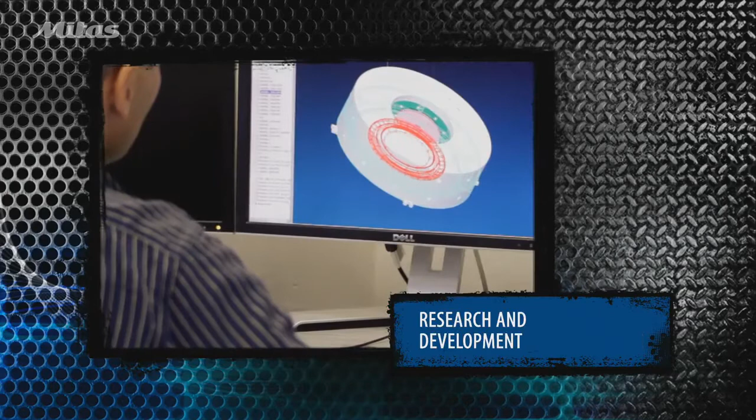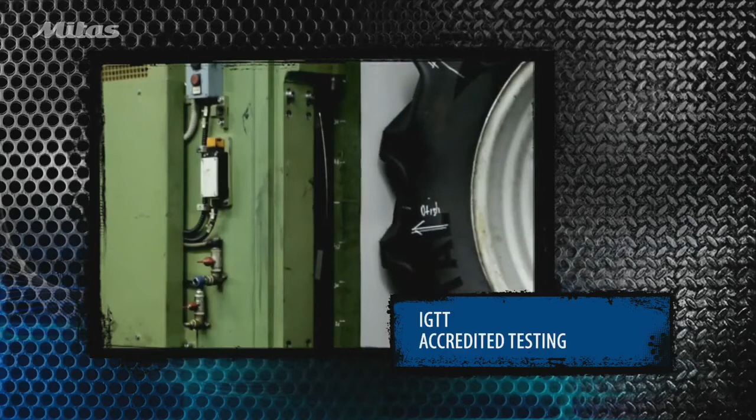We respect international standards. MITAS is a member of the European Tyre and Rubber Manufacturers Association. We invest in research and development to make our tyres long-lasting, fuel-efficient and reliable. The process of developing a new tyre, creating rubber compounds and testing may take up to 4 years from conception to production. Tyres undergo testing in operating conditions and in our accredited testing facility. We insist on quality, effective production, employee expertise and environmental protection.

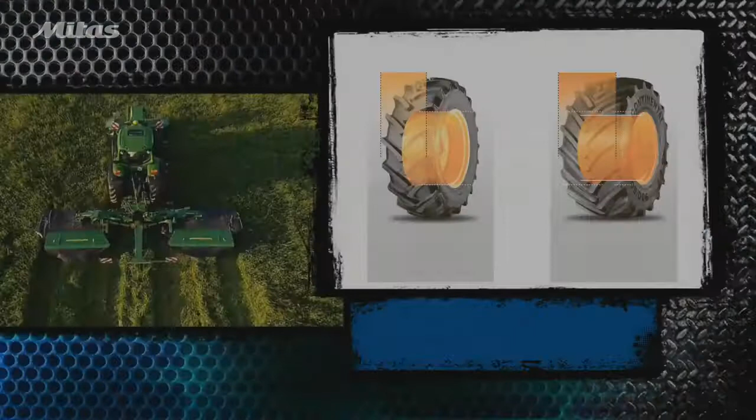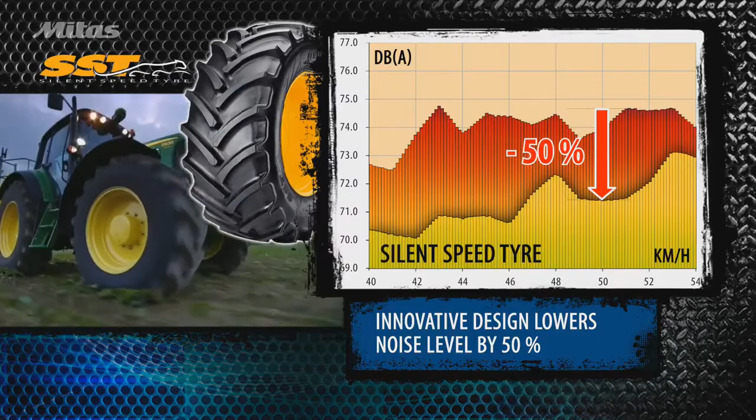Tyres with new features. Super volume tyres are made for power tractors of 200 horsepower or more. With Silent Speed Tyres, we have managed to decrease noise levels in tractor cabins by 50%. When driving, the links between the tread blocks of CR01 tyres stabilise mobile cranes and even out tread wear.

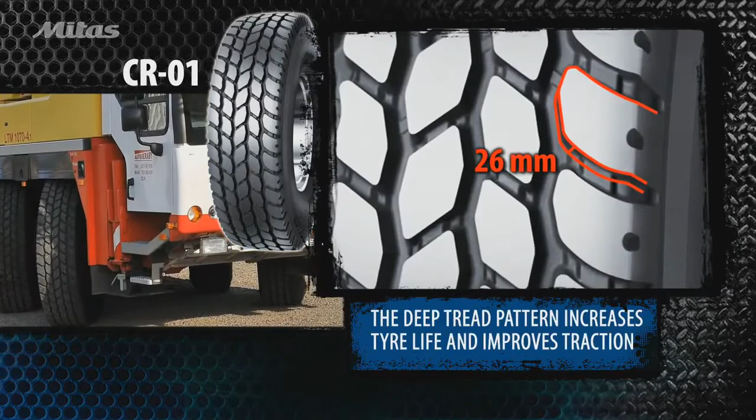An innovative tread compound and all-steel radial construction increases the casing durability of ERL20. Agriterra is a flotation tyre intended for trailers. Agriterra has a longer tyre life and improved self-cleaning properties.

Production plants of MITAS. MITAS produces tyres at 4 European factories. In the Czech Republic, our production plants are located in Otrokovice, Prague and Zlín. In Serbia, the MITAS plant is located in Ruma. Since 2010, MITAS is also present in Iowa, in North America. MITAS has 3,000 committed employees. The total annual production capacity exceeds 100,000 tonnes.

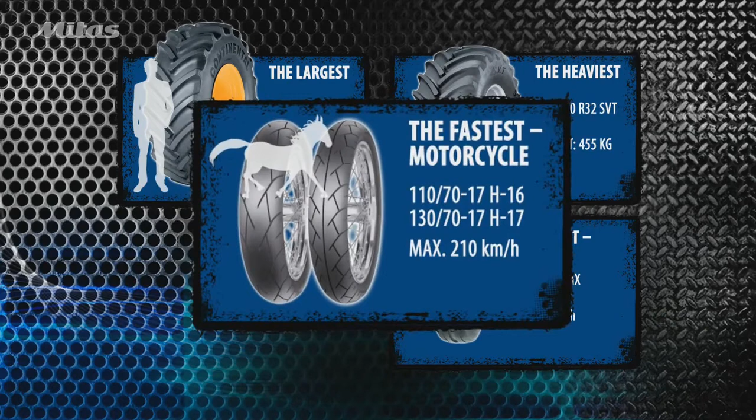Interesting facts about tyres made by MITAS. The largest tyre produced by MITAS has a diameter of 2.2 metres and features 38.5 kilometres of cord. The heaviest tyre weighs 455 kilograms and contains 51.5 kilometres of cord. The fastest road tyre is a motorcycle tyre that allows speeds of up to 210 kilometres per hour. The fastest tyre is an aircraft tyre that allows speeds of up to 300 kilometres per hour.

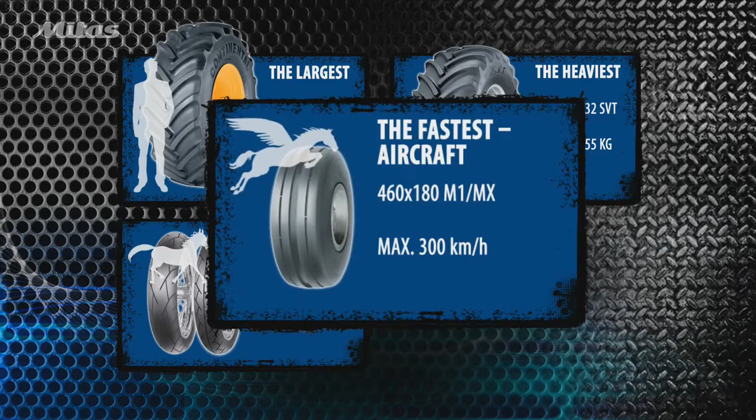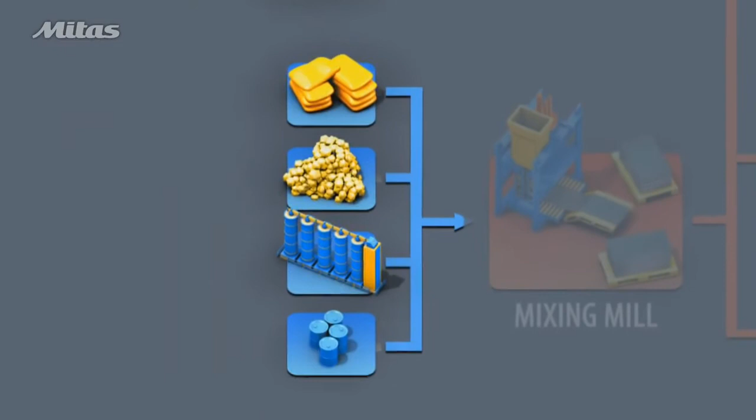This section explains how tyres are produced. These are the main stages of tyre production. The basic components in tyres are steel wires and cord, natural and synthetic rubber, various chemicals and carbon black. The dominant component in tyres is rubber.

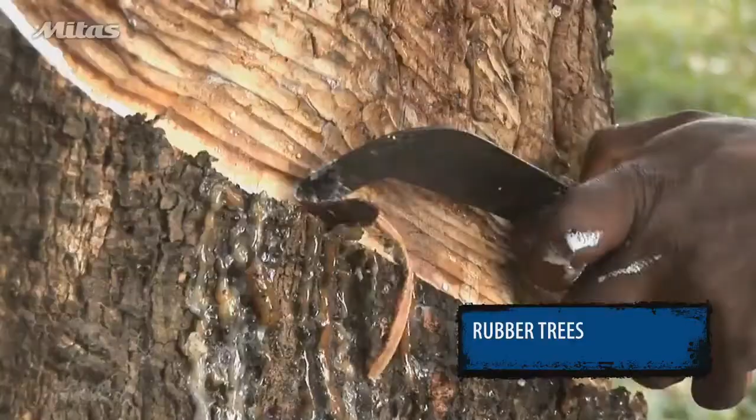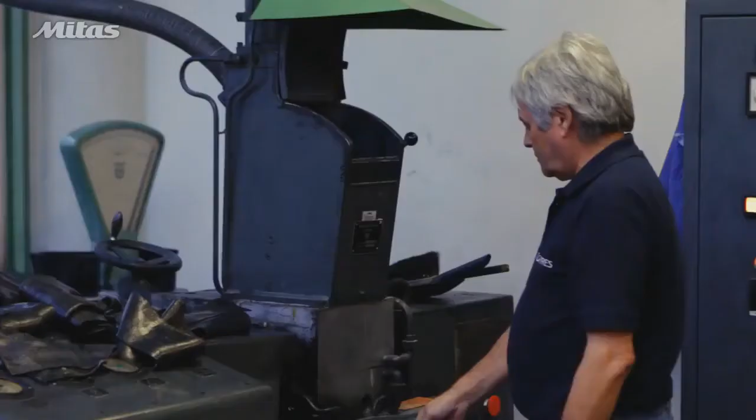8,000 kilometres from the heart of Europe, rubber trees are grown. Incisions are made to harvest the liquid latex. Natural rubber is the most important product obtained from latex. Rubber is then transported to the production plant with the rest of the raw materials and components. In a laboratory, the quality and physical properties of the rubber are tested. If the sample complies with our stringent requirements, the batch is delivered to the mixing room.

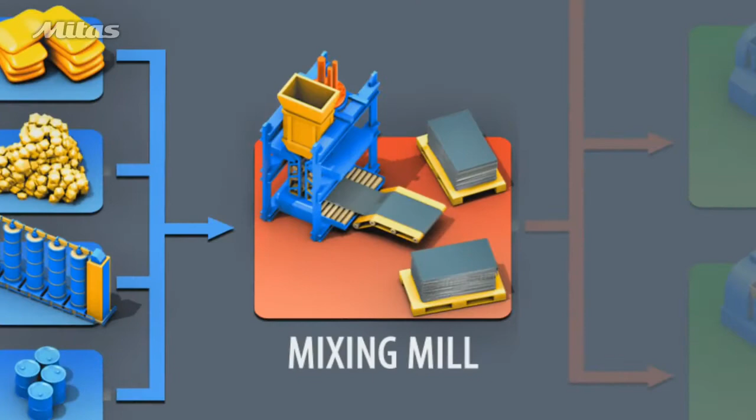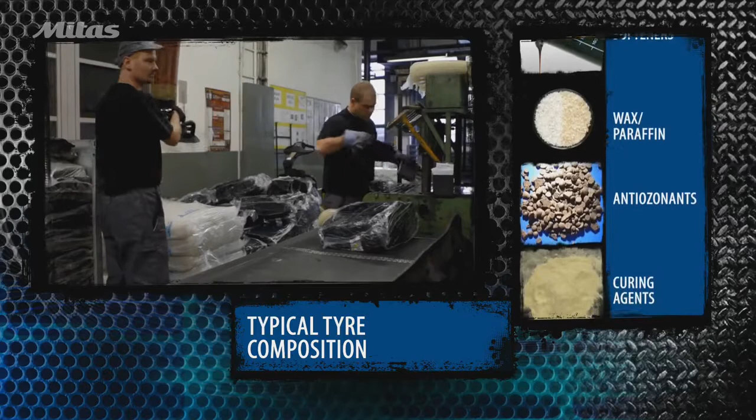Rubber compound mixing. The first stage of tyre production is rubber compound mixing. At the mixing mill, the rubber is mixed with various materials. These include fillers, clay, and carbon black. At the last stage of mixing, sulfur and curing agents are added. The resulting compounds have various properties. Some are used for the inner liner, which holds air inside the tyre, and others are wear resistant and are used to make the tread.

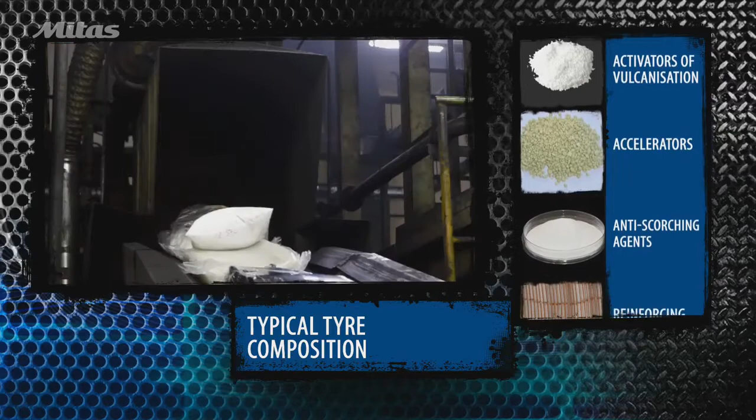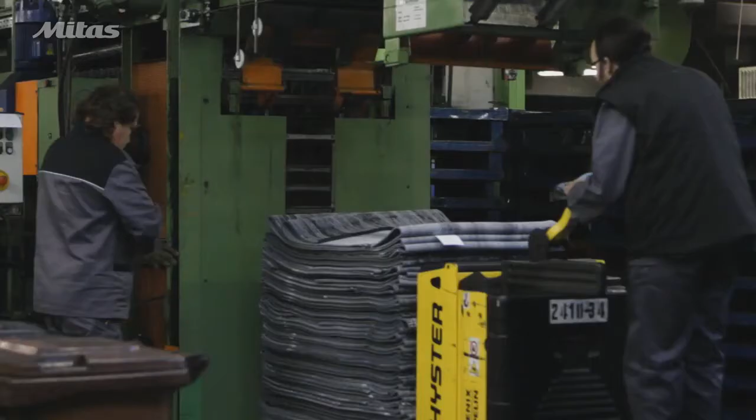In the laboratory, the density of cured samples and other physical and mechanical properties are measured. The resulting blend is formed into rubber sheets and cooled. Each batch is weighed and identified. After additional testing, the rubber compounds are used in further processing.

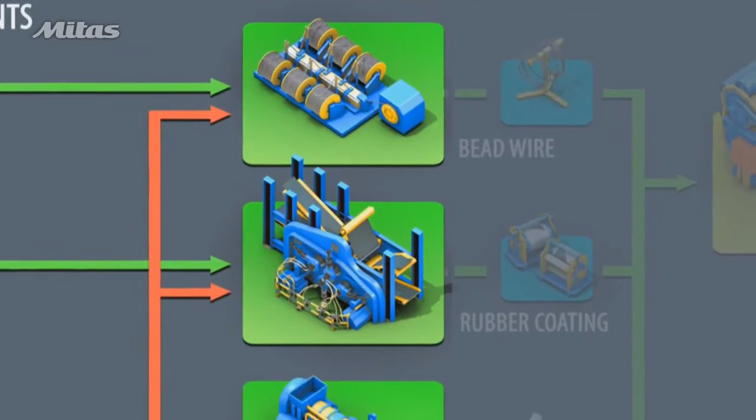Next, we will show the basic components that make up a tyre. The components are produced during further processing. These are bead wires and rubber-coated cord. Other components are extruded and calendered from various rubber compounds.

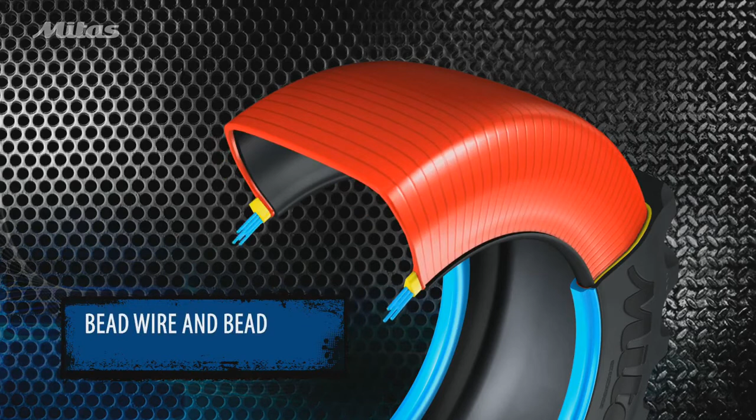This animation displays the basic components of an agricultural tyre. The inner liner is used in tubeless tyres. This is the first carcass ply. Then the bead core and bead wire. And then another carcass ply. Bead lining, and the rim strip.

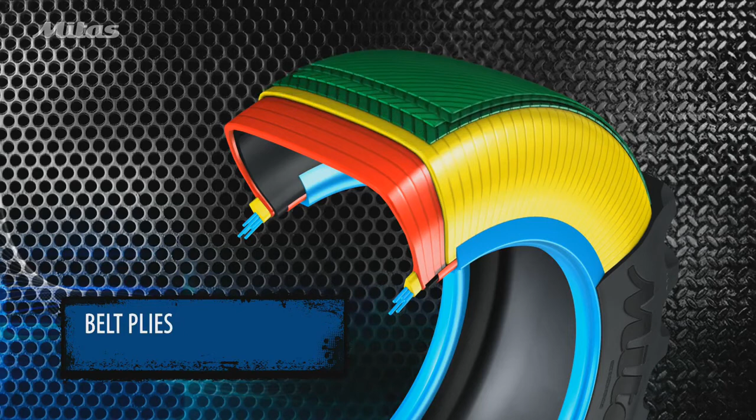These are belt plies. And finally, the sidewall and tread.

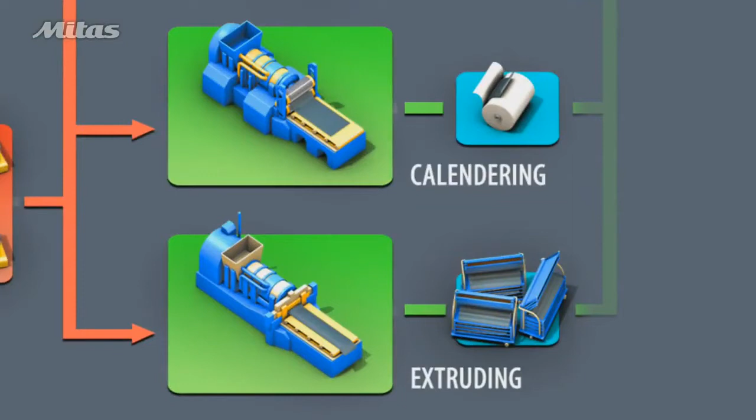Extruding and calendering of tyre components. The mixed rubber compound is used for calendering the inner liner and extruding the tread and sidewall. First, the rubber compound is heated. Then the compound is put through extruder machines, where the tread and sidewalls are formed in the required shapes.

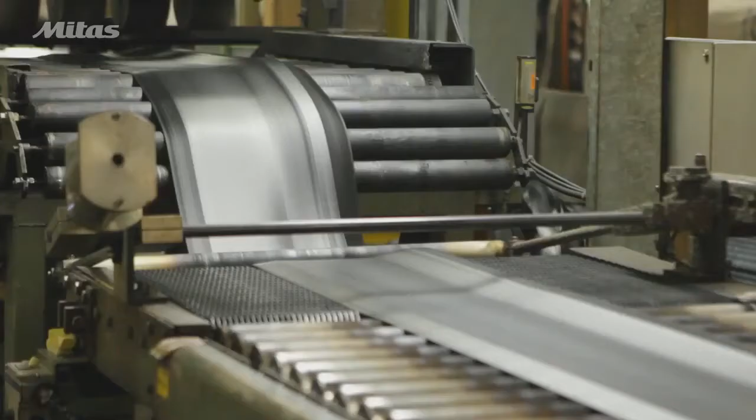The extruders produce a continuous sheet of tread rubber. The sheet is then cooled and cut to specific tyre lengths. The inner liner is produced by calendering. Rubber coating.

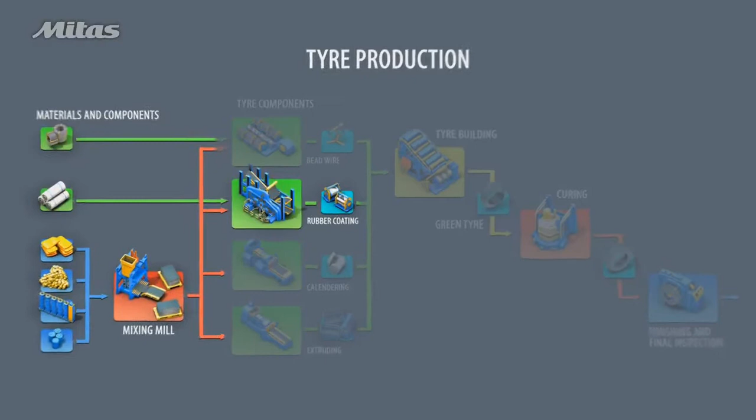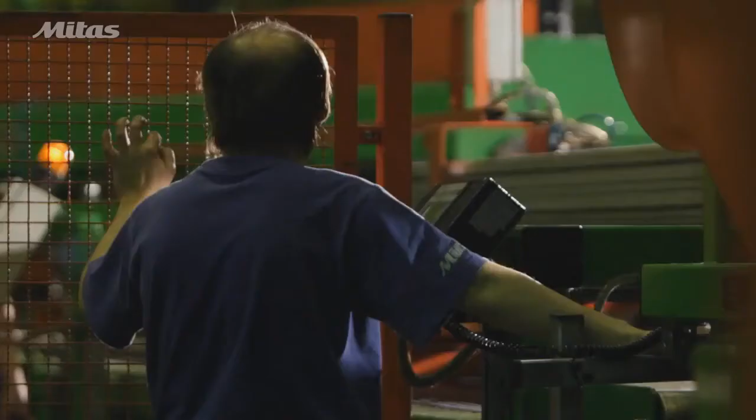The mixed rubber compound is also used for rubber coating. Sheets of cord such as nylon, polyester and steel are thinly coated with rubber on both sides. Once this is finished, the sheets are cut at the correct angle, which determines the tyre's characteristics.

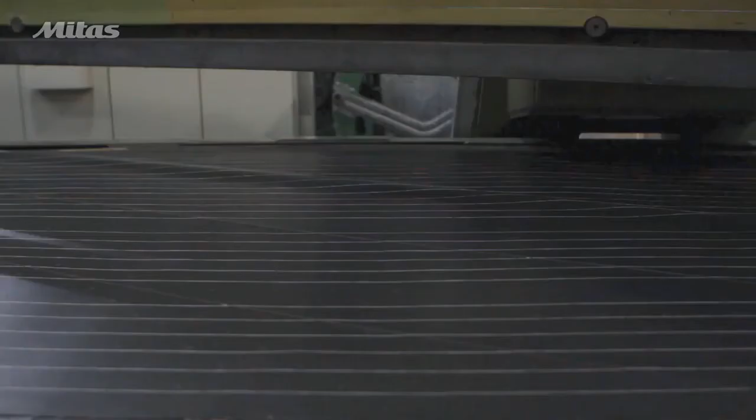These cut sheets are used for casing, belts and other plies. Steel cords are mainly used for the belts placed under the tread and sometimes for the casing. Bead wire.

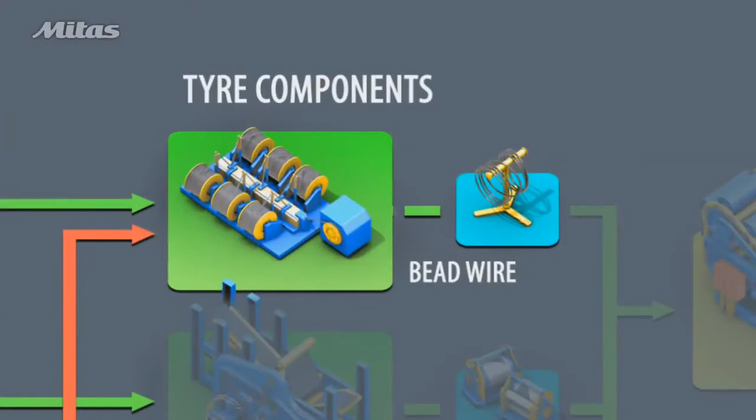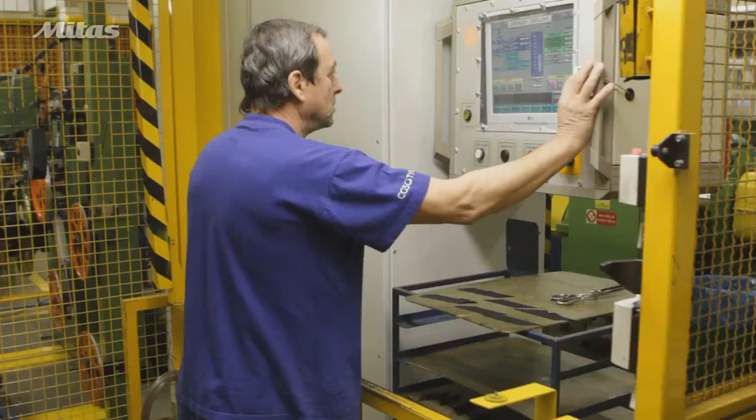Next, the bead wire is produced from rubber and steel. The bead core is formed by aligning and coating steel wires with rubber. Then the wire is wound on a coil to form bead rings. The number of loops and shape of the bead wire are specific for each tyre.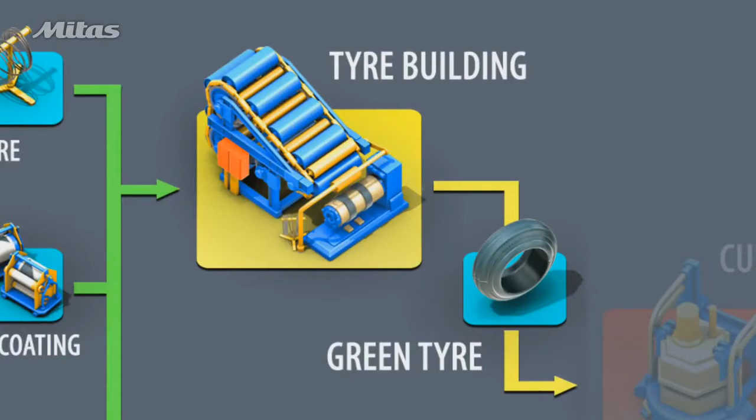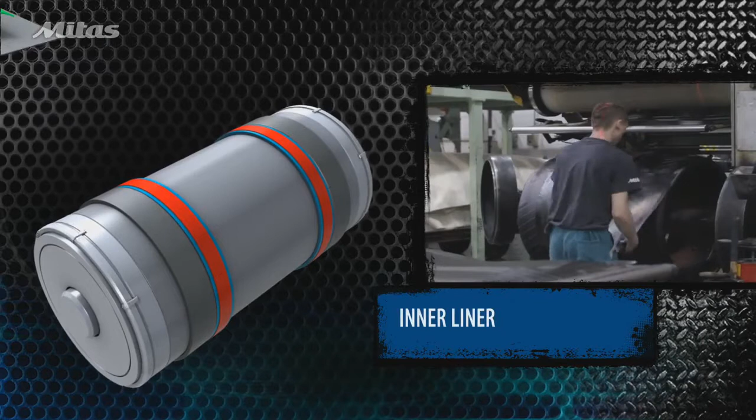Tyre building. At this stage, all the tyre components are assembled. The tyre is made from components on a tyre building drum. Tyre building begins with the sidewall and the rim strip. This is the bead lining. Inner liner and 2 carcass plies.

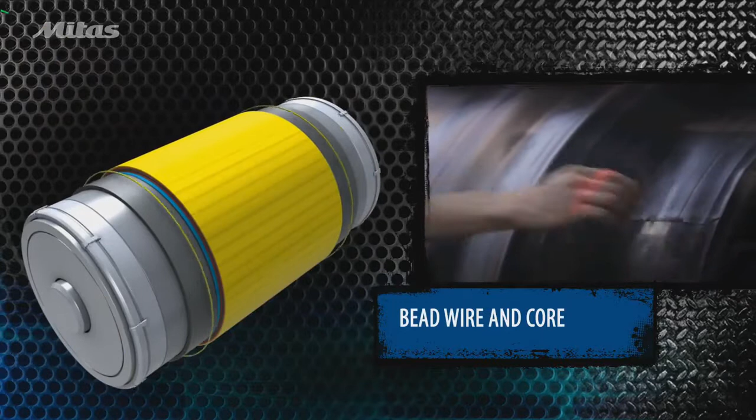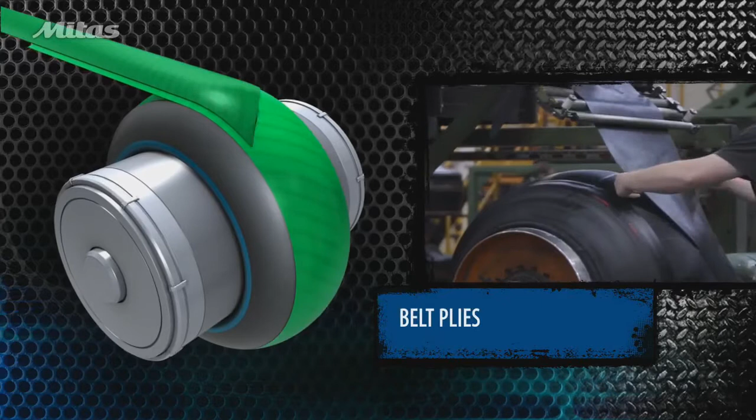Bead cores are placed on the building drum. Then the ply edges are wrapped around the bead core and the sidewalls are moved into position while the tyre is reshaped. After inflation, the belts and tread rubber are applied. For large tyres, the tread rubber is wound onto the belt plies. This process achieves a green tyre that already resembles the final product.

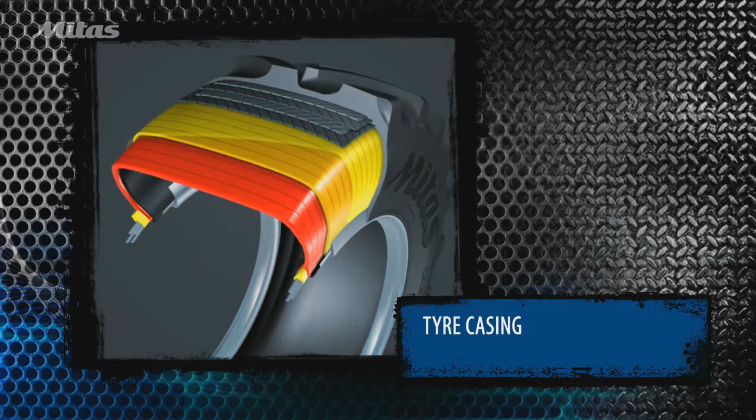The difference between radial and bias ply tyres. There are two kinds of tyres, older bias ply tyres and newer radial ply tyres. This animation highlights the tyre casing. In a bias ply tyre, the cord is laid at an angle of 60 degrees relative to the tyre's movement. Successive plies are laid at opposing angles, forming a crisscross pattern.

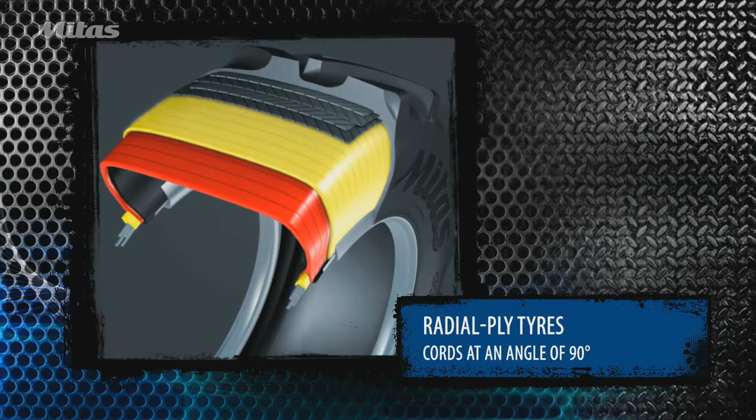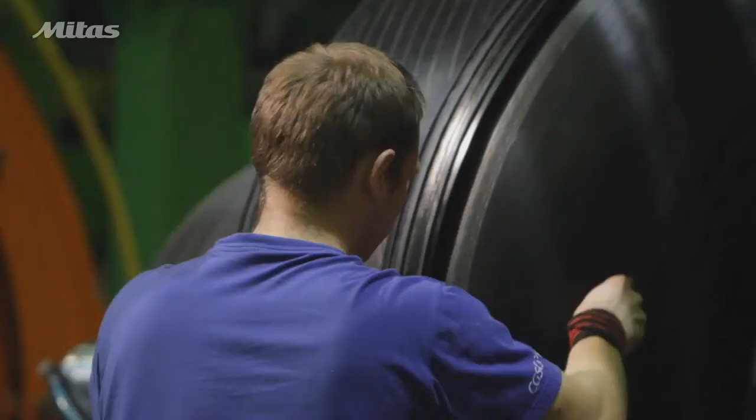Now in the radial ply tyre, the cord in the casing ply is laid at a right angle to the centre of the tread. Radial ply tyres are more complicated to produce, but they have new characteristics. For example, radial ply tyres save fuel, last longer and improve riding comfort. Agricultural radial tyres apply less pressure on the soil and thus protect plant roots.

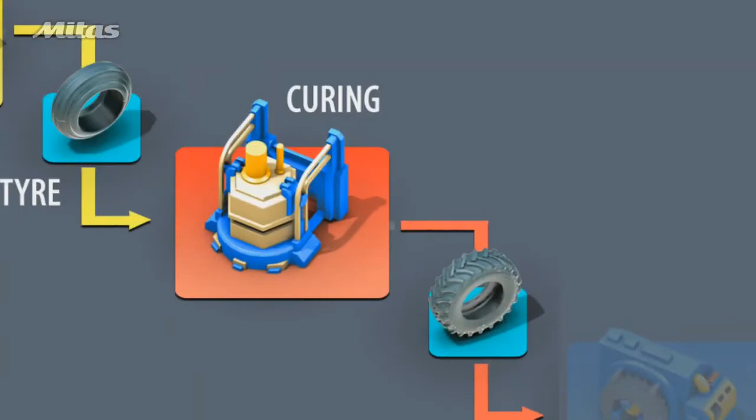Curing of the green tyre. After tyre building, green tyres are cured in a process called vulcanisation, in which the tyre achieves its final shape and characteristics. This is a tyre mould. Prior to curing, the green tyre is covered with a solution that helps the green tyre fill the mould. The green tyre is placed in a curing press.

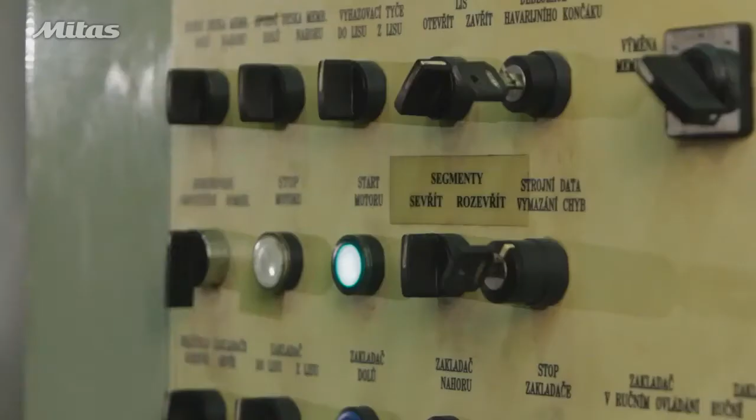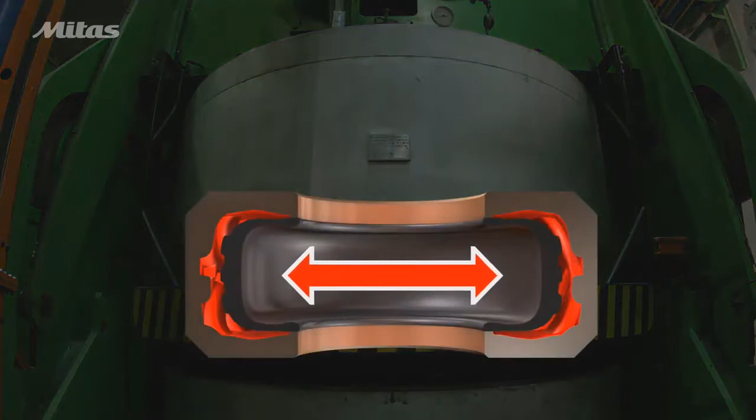The curing medium pushes the green tyre into the mould. The rubber compound is heated and becomes plastic. It fills the mould. The vent system lets excess air escape the mould so that the rubber fills the mould completely. The applied heat also initiates a process called vulcanisation.

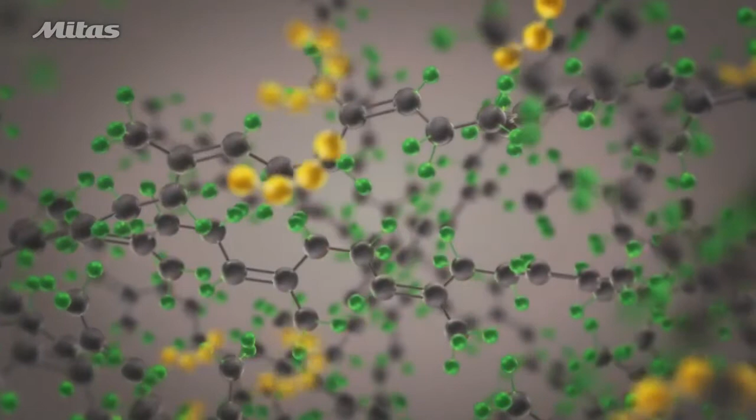This is the basic element of natural rubber molecule, which is a polymer. During vulcanisation, these polymers are linked by sulfur. This changes the molecular structure into a three-dimensional pattern of interlinked polymers. The vulcanisation of a passenger car tyre takes only a few minutes. For an agricultural tyre, the process can take up to 2 hours. This is the final product, a cured tyre.

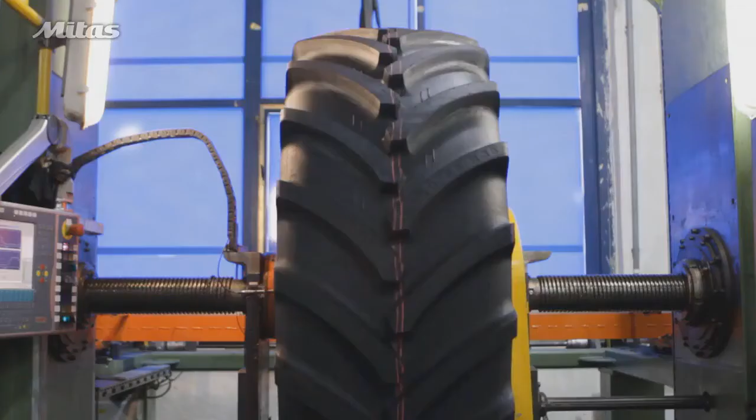Finishing and final inspection. Before the tyre is dispatched from the plant, it is trimmed to order and inspected. Each tyre is visually inspected for surface defects. Testing machines measure the compliance of radial and lateral runout with norms. All tyres undergo a uniformity test.

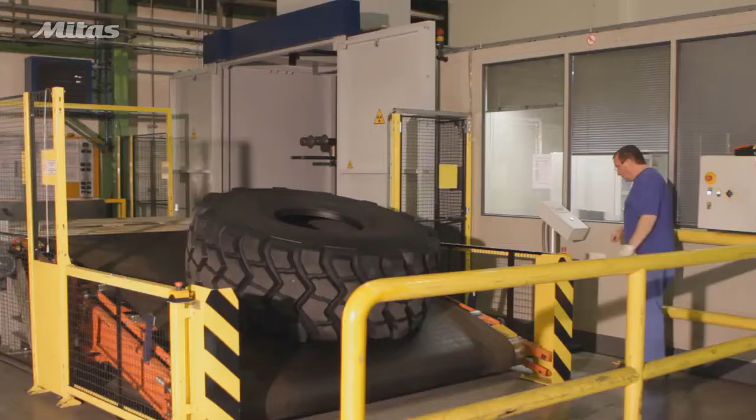Tyres containing steel cords are inspected by X-ray for internal defects. The final inspection is the last stage of the tyre production. The tyre is then stored and ready to be dispatched to customers.

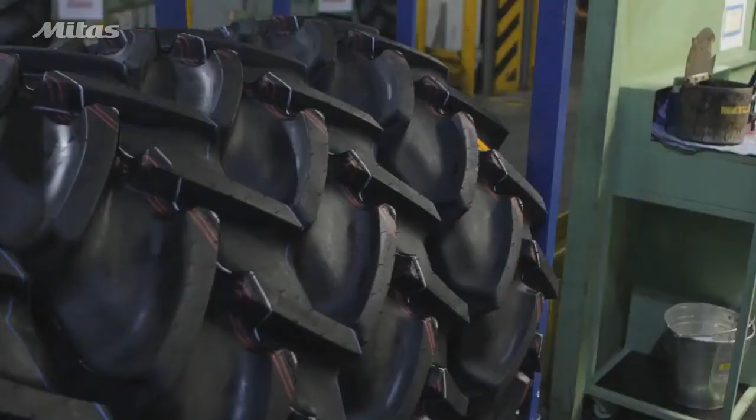MITAS produces tyres under 3 brands. These are MITAS, Continental and Cultor. In total, we produce 1,500 various tyre sizes and tyre variants, from power tractor tyres to tyres for construction vehicles, from tyres for use in speedway competitions to durable tyres with a long life.